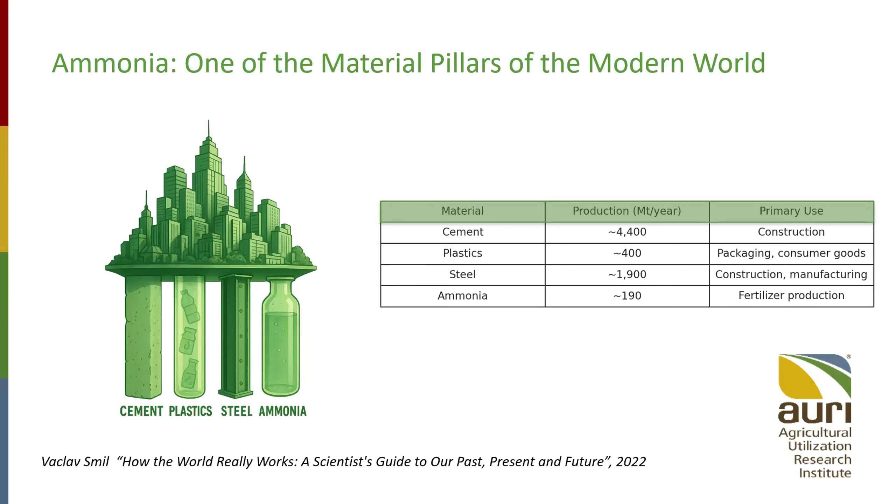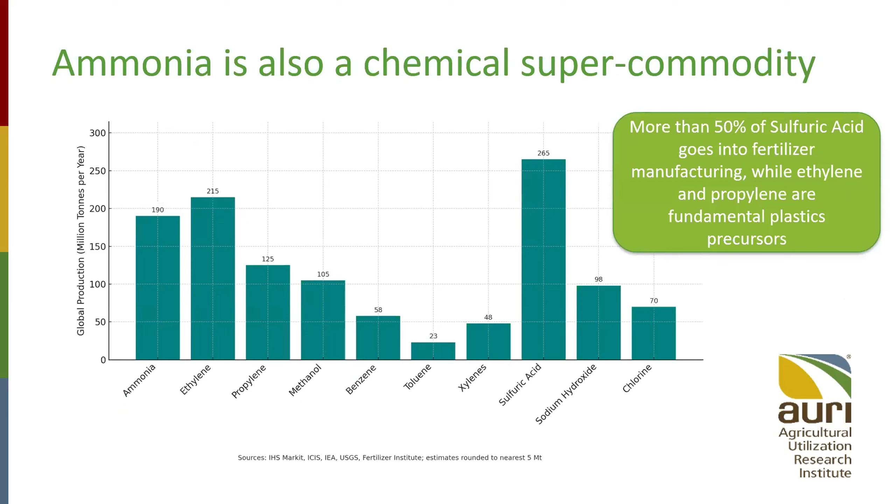However, if this morning any of you had breakfast, probably you have eaten something that owes its existence to ammonia, because ammonia is also a super commodity. It's a very large product. It's the third largest chemical produced, second only to sulfuric acid and ethylene. Ethylene goes to plastic, and sulfuric acid also goes into fertilizer. But ammonia is really the linchpin of every single fertilizer used today. This is a schematic of the fertilizer supply chain, and everything is tied in from ammonia.

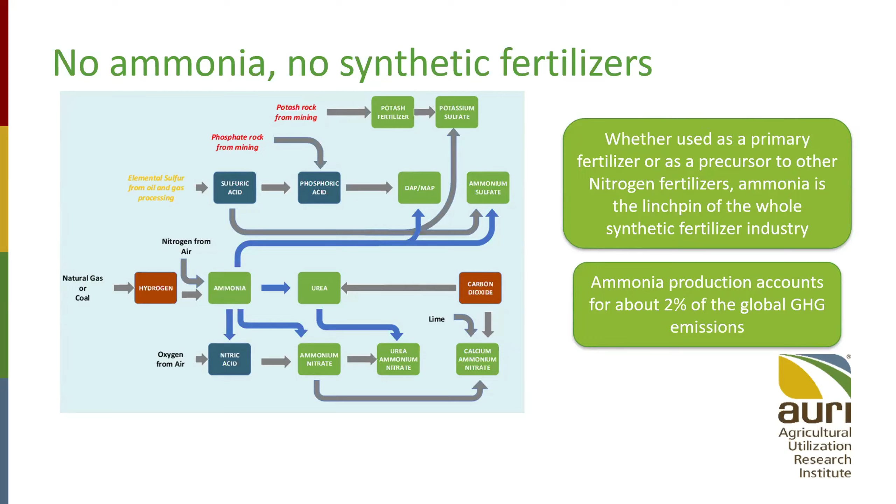As you can see from this diagram, hydrogen is the primary feedstock to make ammonia, where hydrogen and nitrogen from the air, which is very abundant, are synthesized to make ammonia. This is a modern invention. Before the Haber-Bosch process was invented in the early 20th century, ammonia fertilizer all came from natural sources: recycled manure, guano, which is basically fossilized manure, and crops like legumes that fixate nitrogen from the air.

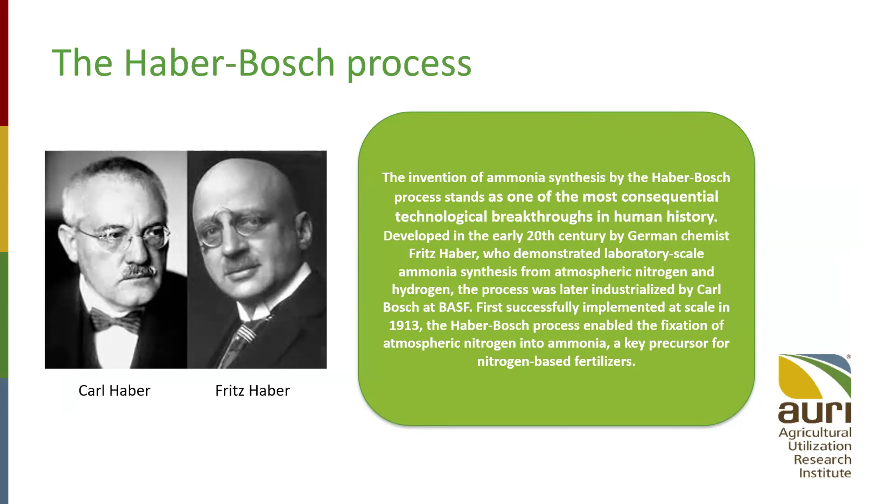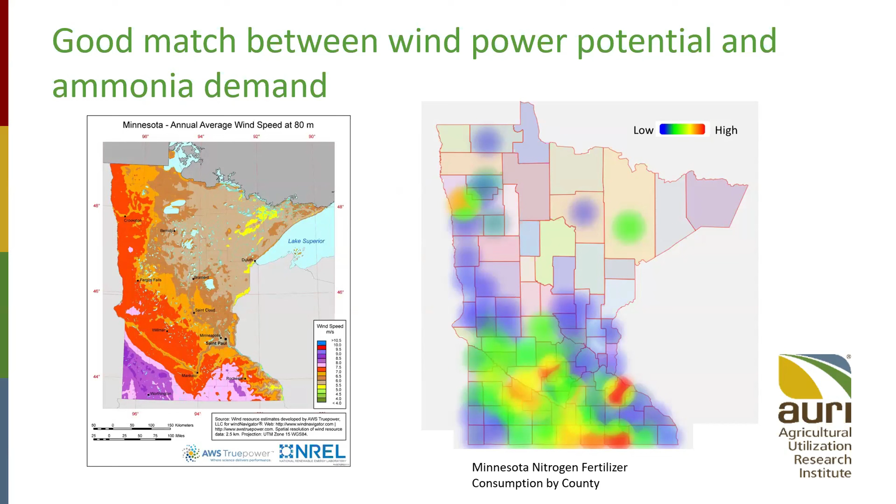But we could make hydrogen differently. For instance, we can make hydrogen by electrolysis. And what is interesting is these two charts, which show on one side the wind resources in the state of Minnesota, as an example, and the Minnesota nitrogen fertilizer consumption by county. And as you see, there is actually a decent match between availability of wind resources and demand for ammonia, which leads to the opportunity to look differently at ammonia,

looking at local distributed ammonia production. A world-class ammonia plant today is hundreds of thousands of tons per year or millions. Some of the larger plants in the US are in the order of 3 million tons per year. Instead, we are looking at whether we can build, and technically we can, smaller ammonia plants tied to local distributed electrolyzer capacity, which in turn is tied to local wind production capacity, providing locally and arbitraging on that big spread associated with distribution and logistics, while maintaining a lot of value in the local community.

And so again, I think there is a great opportunity for small scale distributed ammonia production. Later, Mike Reese will talk in more detail about these economics and will probably go into many more quantitative details. But ultimately, with this presentation, I just want to give a very short but broad overview of why ammonia is important, more than important, indispensable, and what direction we should look at to make sure that we can continue to rely on ammonia while mitigating some of the economic and environmental impact that it might have. And with this, I leave it to the next presenter.

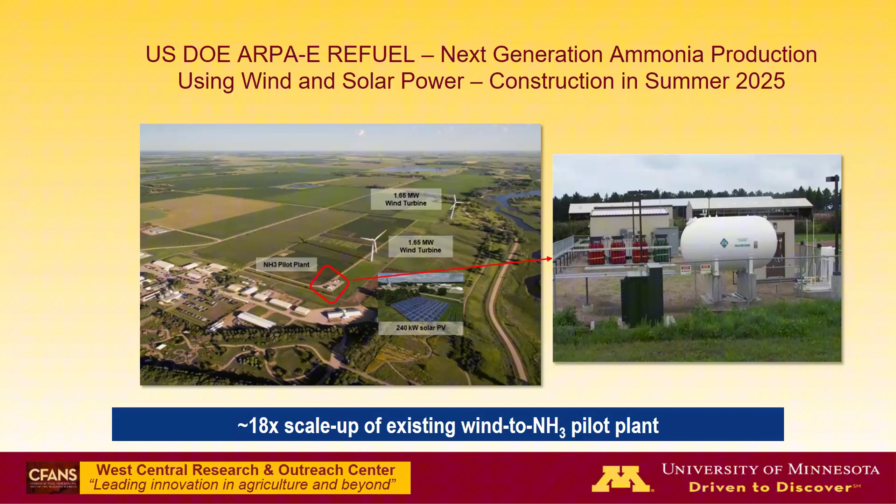Minnesota is a global leader in green ammonia research. We had the first wind-to-ammonia pilot plant in the world back in 2013 and have looked at other projects such as using ammonia in grain drying as well as tractor fuel. Our next project, which is scheduled to start construction very soon, is the next generation ammonia production system using wind and solar power and utilizing some advanced ammonia reactor designs as well as control systems.

So conventional ammonia plants today are at world scale. They use natural gas as the core energy source or hydrogen source in the United States. In China, they use coal, but here in the US, we have established our ammonia production essentially located around natural gas sources. And that's why we see quite a bit of it in the Gulf Coast, in Louisiana, and in Oklahoma and Texas, and not so much in the Corn Belt.

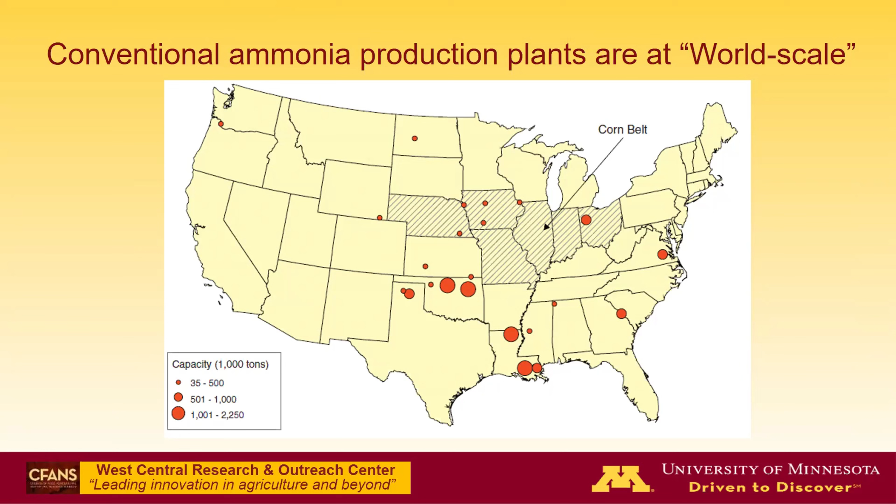In this diagram, I'd like to point out that Minnesota isn't included in the Corn Belt, but I think those of us from Minnesota would say we are definitely within the Corn Belt.

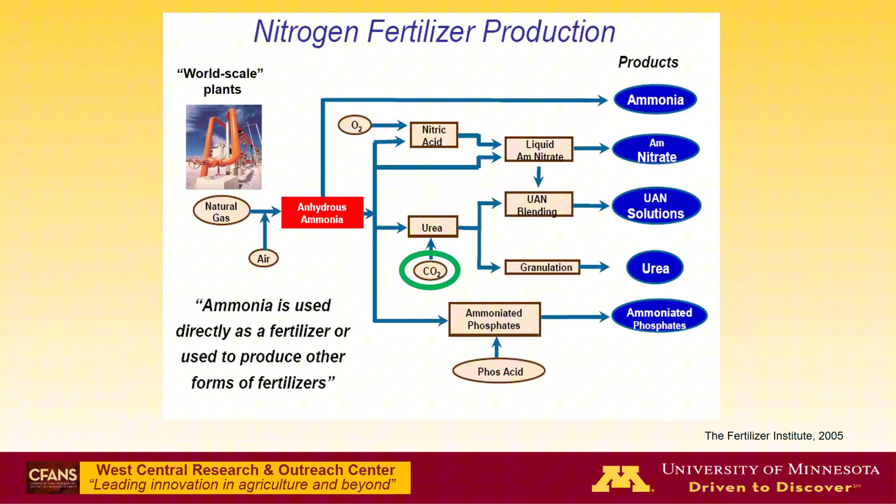So the nitrogen production, again, is at world scale. Anhydrous ammonia is the core. We use steam methane reforming to break down natural gas into hydrogen. And then anhydrous ammonia is processed further into other nitrogen sources, as Luca said. I wanted to point out that for urea, we blend ammonia with CO2 to form urea. And that's going to be important further down in my presentation.

If you look at nitrogen fertilizer use by state in the Corn Belt, we see Iowa, Illinois, Nebraska, Minnesota, all of these states have extremely high consumption of nitrogen fertilizer. And interestingly, there's very little ammonia production in these states. And that gets back to what Luca was saying, that there's essentially a $300 difference between storage, transportation, as well as the margins that are charged in each of those steps to get it up to the Midwest.

You look at green ammonia, which is renewable ammonia made from renewable sources such as solar or wind. You look at the wind resource that we have, which is depicted in the left graph. The dark purple and lighter lavender colors are the high wind resource areas. And then you look at the Corn Belt, which is identified on the graph on the right with the dark green counties. And you see a nice synergy where we can use renewable energy to produce renewable ammonia.

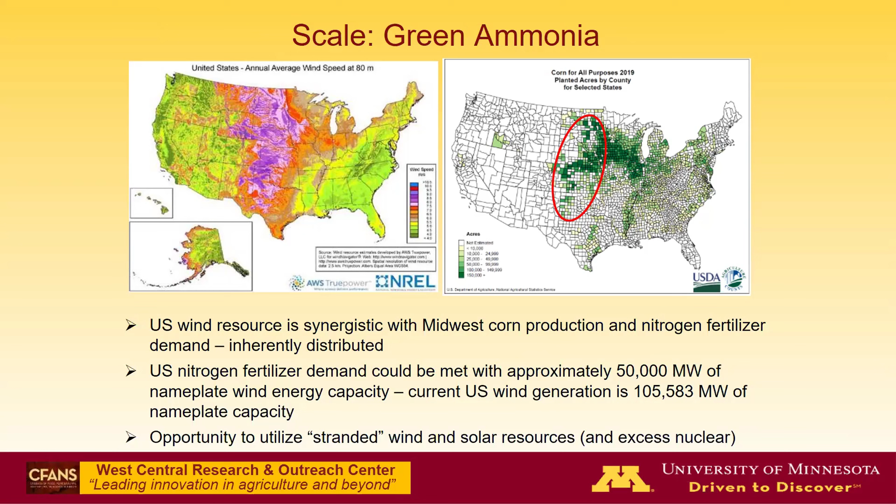We could meet the entire U.S. demand for nitrogen fertilizer with about 50,000 megawatts of nameplate wind energy. Right now, we have over 100,000 megawatts of wind energy, so we could essentially add another 50%. And this is an opportunity to utilize wind and solar resources and excess nuclear power where it's stranded, where there isn't the load. So we're essentially creating a load with this energy-intensive industry.

When you look at the renewable nitrogen fertilizer market in comparison, you would produce it closer to demand. Renewable energy such as solar and wind is typically considered a stable cost. Utilities sign 20 to 30-year contracts for that power. Then along with that, we would have the local economic development.

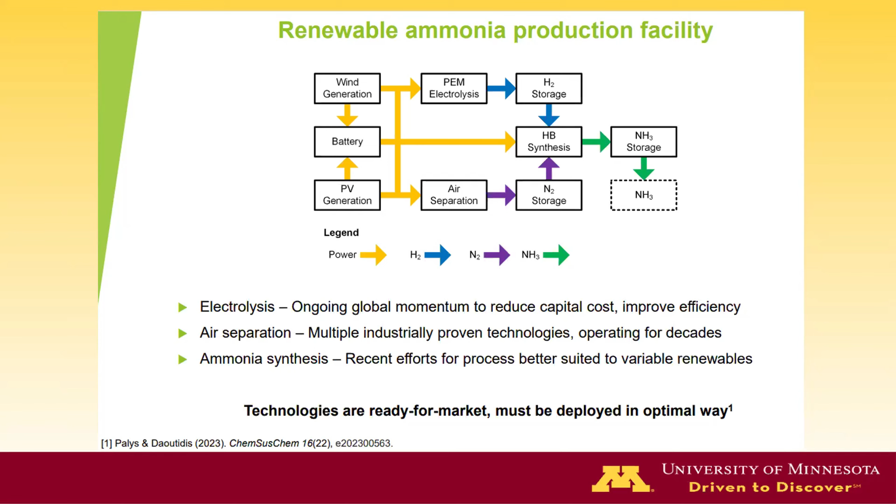So this system would include electrolysis. So you're electrolyzing water to produce hydrogen. You're pulling nitrogen from the air through air separation and then combining it together through ammonia synthesis. And these technologies are different at a smaller scale than what they would be at the world scale plants. And so these technologies must be deployed in an optimal way. These technologies are, however, ready for market. And as new technologies become available, they are entering the commercial system as well.

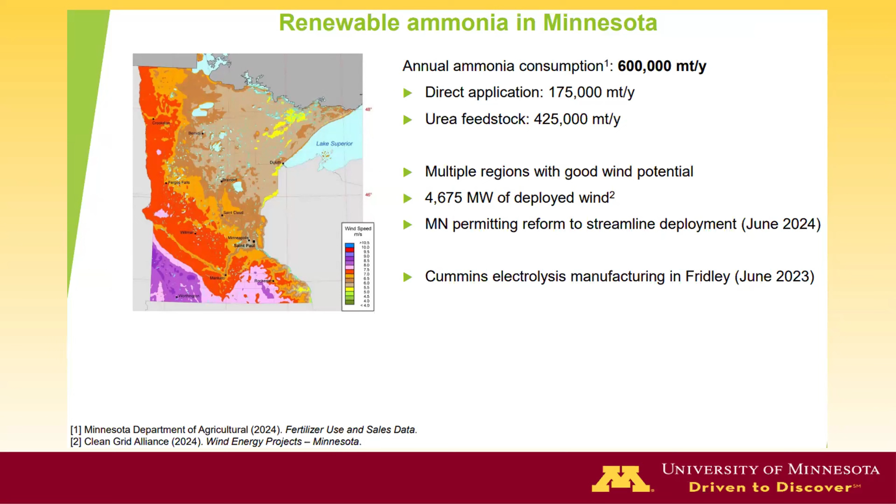So just to take a case example of ammonia in Minnesota, we utilize about 600,000 metric tons per year, both in ammonia as well as urea. We have good wind resources across the state, especially in the Southwest. There's some factors that are enabling this. We have some permitting reform in the state. We've also established electrolyzer manufacturing in Fridley to supply these electrolyzers, which is kind of a critical supply chain element, having the supply of these larger electrolyzers.

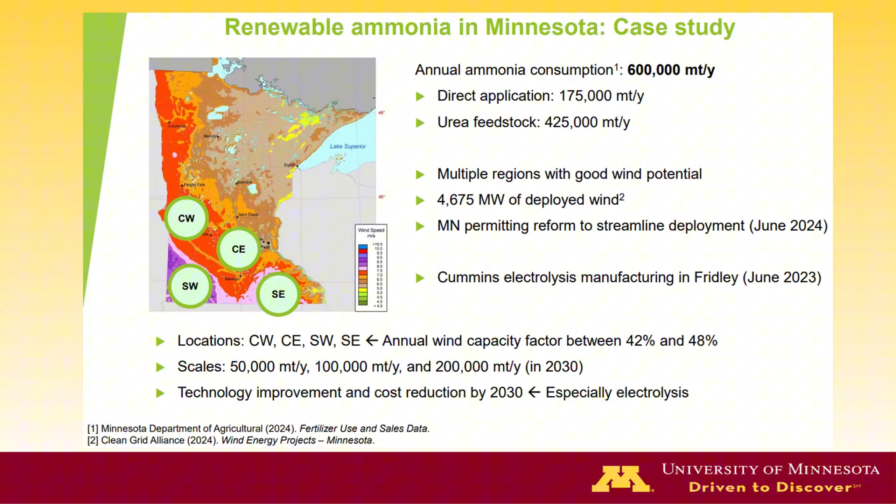So if you look at renewable ammonia production in Minnesota from a standpoint of where to do it, the wind resource makes a huge difference. So my colleagues, again, Matt Palys and Prodromos Daoutidis, did a study on this, looking at producing scales of 50,000, 100,000, 200,000 metric tons in central west, southwest, central east, and southeast Minnesota. And here's a view of the results. And location does matter, by the way. So if you take a look at central east versus southwest, you see almost $110 difference per ton between those two places. And so that's one of the outcomes.

The other outcome is if you look in general at the top of the screen, you see 666, 668, 558, 583. That's basically the break-even price of the ammonia production at that scale and at those locations. So it's close to being where we need it to be competitive, not quite there yet. So if you look at a larger scale, in this case, it's 50,000 tons versus 100,000 tons. You can see at the lowest in Southwest that we're down to about $500 a ton. So we're driving that price down. So the overall point is that scale still matters. For that 100,000 metric tons, you would need about 275 megawatts of new wind capacity to do that.

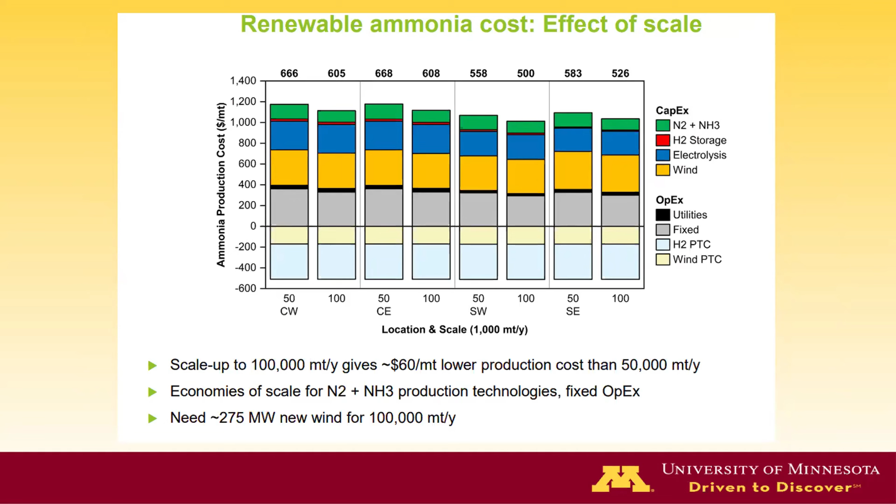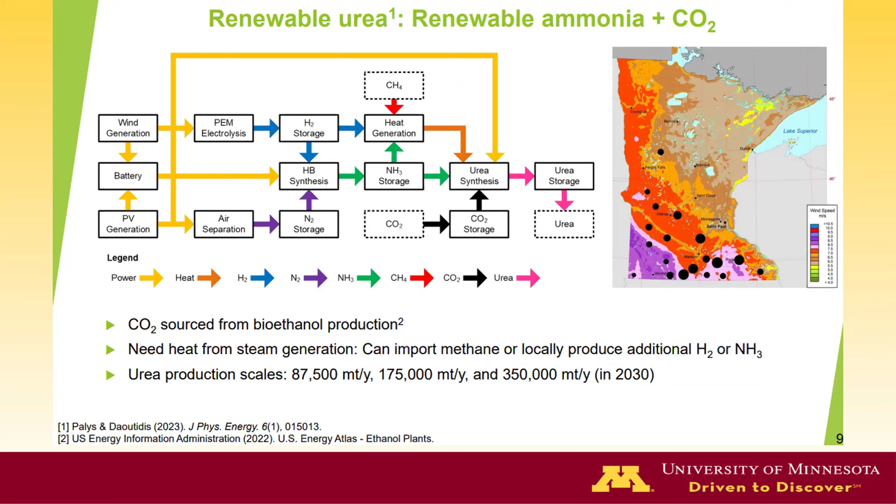I think an interesting part that we could further explore, and Luca mentioned this briefly, is combining renewable ammonia production with the CO2 that's produced at our ethanol plants. The state map on the right shows where the ethanol plants are located and their size. And so the idea would be that we would take wind energy from some of these high wind producing areas. We would, at the site, produce hydrogen, convert it to ammonia, and then truck it or pipe it into these ethanol plants, combine it with the CO2 to produce urea.

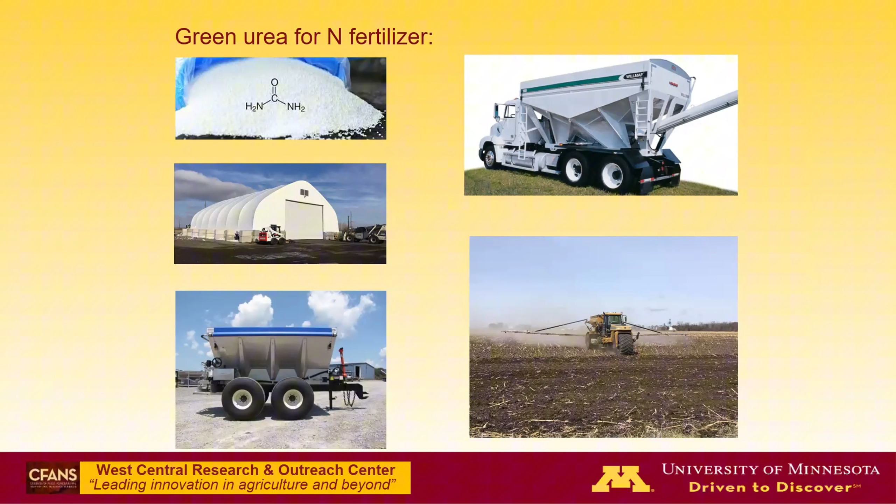Let's move on to this. I think green urea is also nice in that you're taking it out of the conventional nitrogen fertilizer supply chains. For example, ammonia requires large-scale refrigerated storage, whereas urea you can store fairly easily and it applies fast and convenient for farmers. Our cooperatives are set up to store essentially their complete consumption for the year, so they have these large urea facilities that they can bring urea into and store for the year. So with that, hopefully I gave you a picture of the difference between small scale versus large scale conventional production.

I think the overall message is that we can do this at small scale. Scale still matters. It's better to be on the larger side of that, similar to what we've seen in the ethanol industry, where a 100 million gallon per year plant is more competitive than a smaller plant. So I guess that's the overall message, and I'll pass it on to Tristan to talk a little bit more about turning this into a commercial reality.

Thanks, Mike. Appreciate that. Let me get the slides up here. Give me a second. And while you're doing that, Tristan, I'm just going to remind audience members to use the Q&A box down on the bottom if you have questions for the panelists. Okay, bear with me a second. All right. Sure. Okay, can everybody see this? All right, thank you.

Building on what Luca and Michael had to say. My name's Tristan Peitz. I lead the business development efforts for Talus. We're a small scale green ammonia company. We really think of ourselves as an energy technology and infrastructure company focused on producing green ammonia.

I'll go over this quickly because Luca and Michael gave a great overview, but ammonia is responsible for feeding a majority of the world's population. Without it, there'd be serious food supply issues. It's a complex global supply chain, and as they both said, it's typically produced in large centralized plants. And because it's a gas, it needs to be stored as a liquid, whether that be under low temperature or high pressure.

We produce ammonia, and this is actually a slide from our international, customer focused deck, making the transition from urea to ammonia, because in the developing world, the genesis of Talus was really around producing fertilizer locally in places where there is no supply chain or where the supply chain is incredibly expensive for urea. And so some of the things that we think about are, ammonia is more efficient than urea. First and foremost, it's cheaper. Of course, there are issues with the logistics, but if you can produce it locally, you can alleviate that heavy and expensive logistics burden.

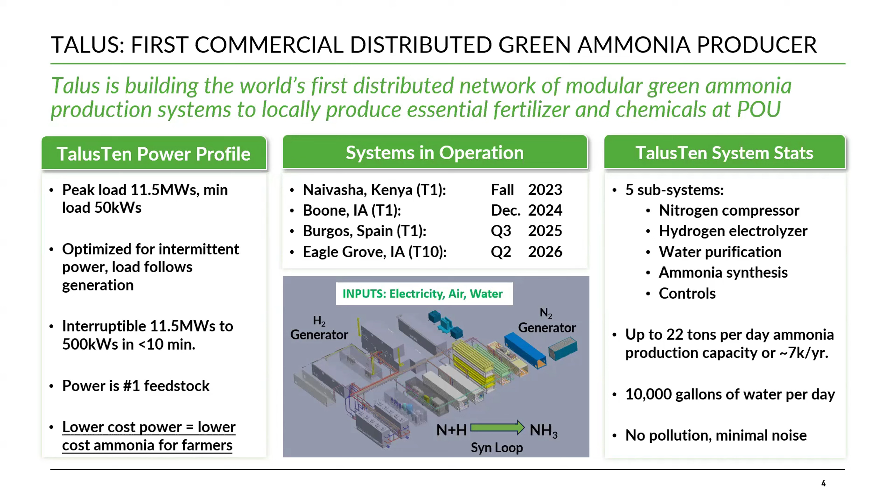The interesting thing about the system in Boone is that we're currently integrating it with Landus's grain facility and the solar that Landus built. They have highly variable power usage because they do grain drying and load trains. When they start drying grain or loading a train, our system gets a signal and it ramps down. The power is routed from the solar to their facility, and they expect to save as much money on power costs at this site as they expect to make selling the ammonia.

These are photos of the system. This is an old photo on the left of one of the electrolyzers being loaded into the module at Eagle Grove. On the right side is the system in Spain. You'll see it's a little bit different - there's an adiabatic cooling system, which uses a lot less water and more energy. These TalusOnes are demonstration scale units as part of programs to deploy many more of the larger TalusTens on long-term offtake agreements.

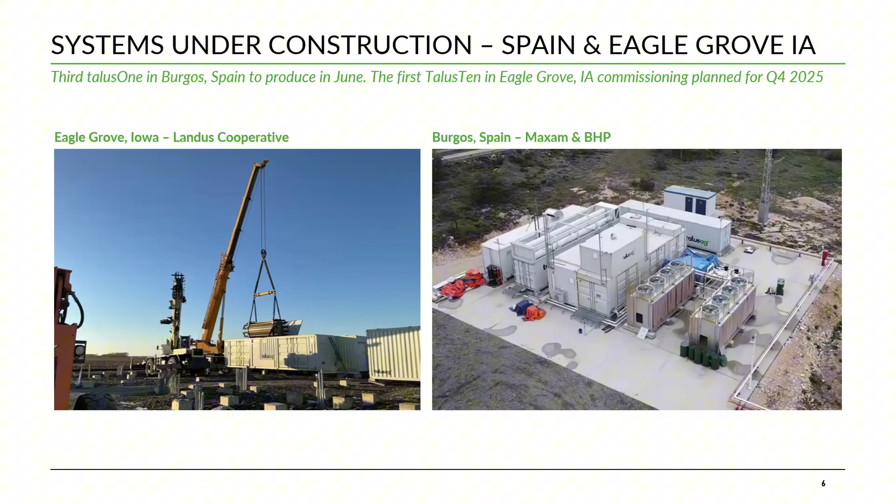So that's a demo unit as part of a program to deploy systems to Maxam and BHP in Chile at the mine sites.

The key value proposition that makes this possible in the U.S. is the rampability. The grid in the U.S. is designed for the peaks, and so what we do is we operate in the valleys. We avoid those peak times, which enables us to produce low cost ammonia.

Fundamentally, ammonia is a commodity. There currently is no green premium. It's possible that one develops. Certainly, the large plants on the coast in the Gulf and elsewhere in the world expect to sell high-priced ammonia into Europe and South Korea and Japan. But that's not our sandbox.

When we think about operating the system, it's really producing hydrogen and ammonia at the times when power costs the lowest. Some cooperatives and electric utilities have interruptible rates, time of use rates, load management programs, demand programs, and this is a key point of how we are able to price ammonia at what we see as a discount to the long-term average.

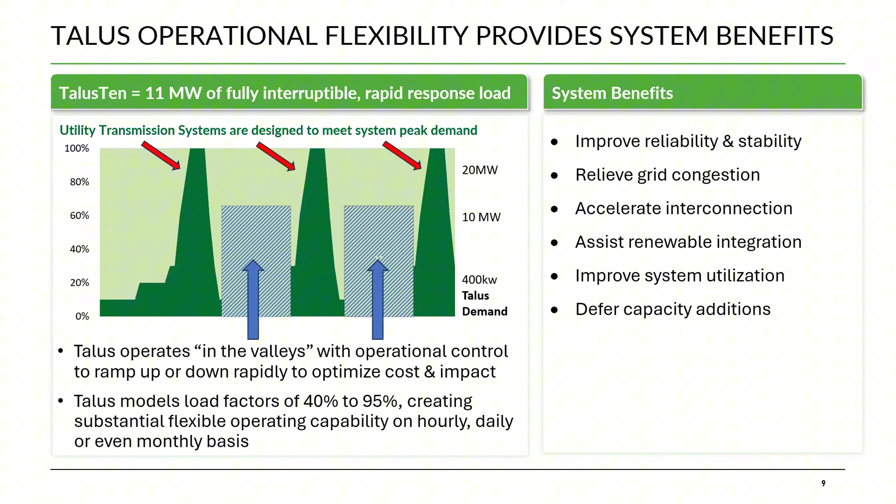I'll get into the contracting structure in a minute. But building on what Michael had to say, you think about the great power generation resource in the Corn Belt - it really is wind. It's the highest capacity factors in the country. There's really good intersection of local ammonia demand and high capacity renewable power, which also happens to be the cheapest form of electricity.

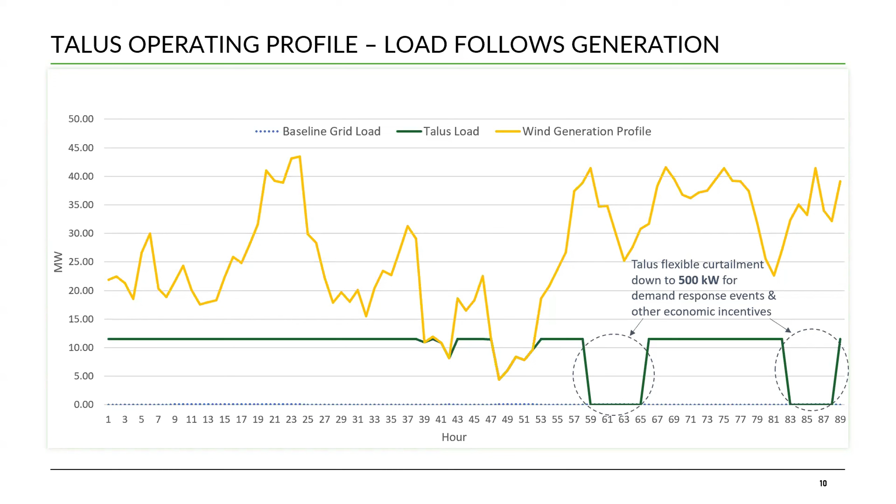Our system is able to ramp down, which is important to miss those peaks. Then it can do that pretty quickly and ramp up a little bit slower, but still sufficient to work with the rates that some of these utilities do offer.

I want to talk about the tax credit briefly, and we'll come back to this as a lead into Rob. Effectively, 45V is what created an opportunity for Talus to build a business in the United States. Prior to the Inflation Reduction Act, our CEO Hiro Iwanaga, a co-founder, funded the early research in 2008 at Stanford to develop a modular small-scale green ammonia system that works on renewable power. It was conceived for this rural, remote, developing world application. With the tax credit 45V, which is a production tax credit, we can sell ammonia in the United States and be competitive.

Now, we did get clarity last week. The big beautiful bill was signed into law, which provides effectively 5 years for companies, from start of 2023 to January 1, 2028, to start construction. We worked very closely with the Senate Majority Leader's office when the first draft was released to ensure that we had the runway to get these projects started.

The ammonia market is an interesting one. It's opaquely priced - there's no futures, there's no forwards.

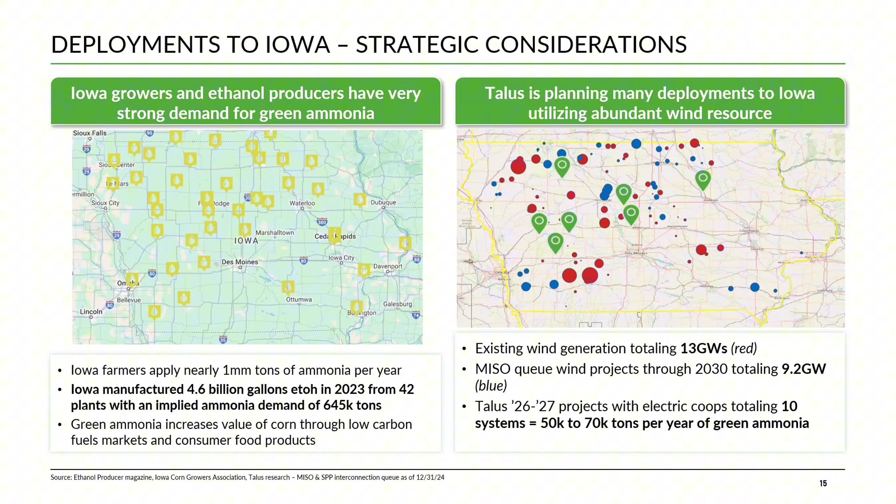Moving on, South Dakota is a very interesting one because there's abundant wind, but no nitrogen fertilizer production at all. And those farmers pay the highest prices in the Corn Belt for nitrogen fertilizer.

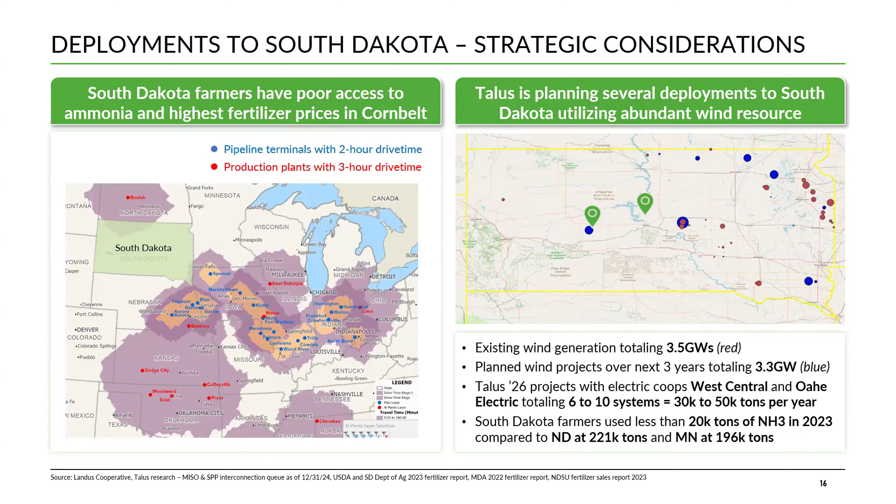The last thing I want to touch on is in order to qualify for 45V, we need to evidence that we've used clean power through REC or EAC purchases, and that has value in ethanol and other markets. We can actually sell the green attributes of the ammonia, and that's something we're working with Rob and CleanCounts on. So with that, I'll pass the baton here. These green attributes - you can think of it as effectively a global food producer, food and beverage, will pay us for the environmental attribute, which is another form of revenue we use to further reduce the cost of the ammonia to the American farmer.

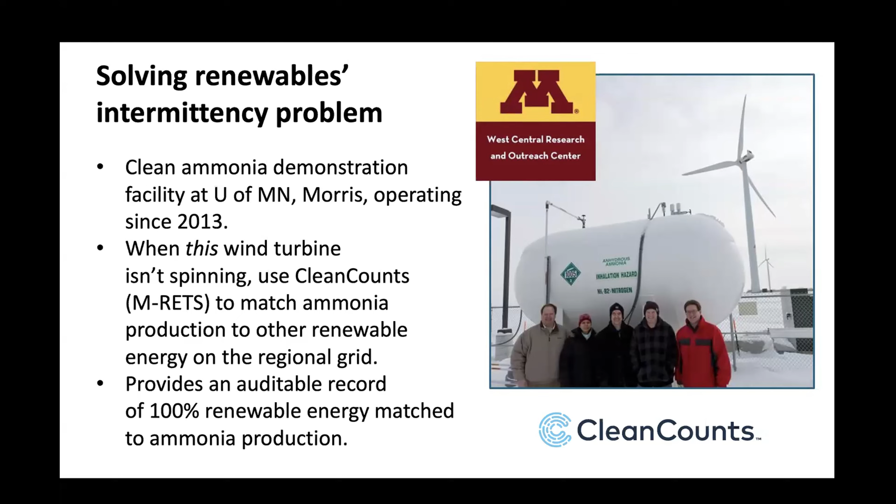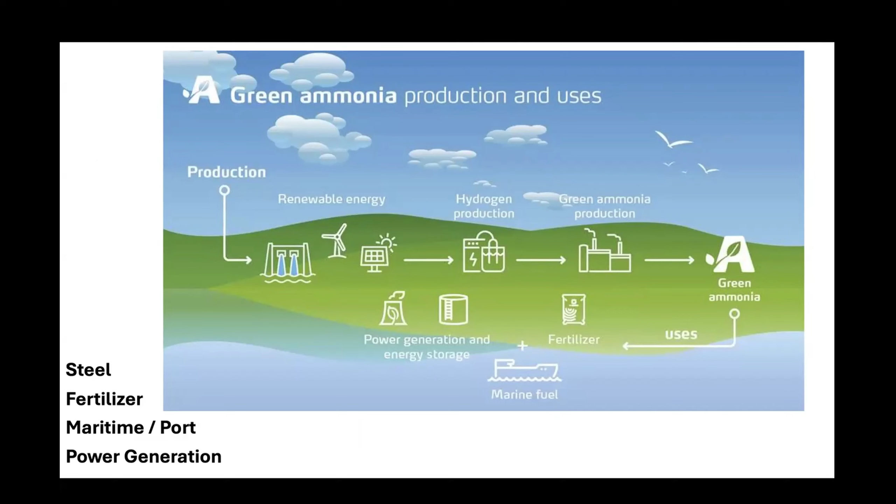It's really a treat to work closely and collaboratively with Talus and other leaders in this space, to do both demonstration and bring to scale systems that show the opportunity for ammonia and the difference this can make in the lives, livelihoods, and economies of rural America. We're excited and ambitious for the opportunity across the Midwest and in places suffering from fluctuating renewable prices. Ammonia fertilizer has great opportunities with fertilizer use, but there are also multiple other uses, from steel to maritime to power generation to mining.

Very much appreciate Rachel, you and Nathan convening this conversation today. So timely and well orchestrated to be right after the news of the finalization of and having certainty with regards to 45V. Thanks for convening the conversation today.

Thank you, Rob. That gives us a good lead into the main question around 45V, since it is so fresh. So, and this can be for all the panelists, whoever wants to start first, otherwise I can call on you if nobody jumps in: how are the new final rules for 45V, particularly the requirements around deliverability and time matching, expected to impact project development timelines and investment decisions?

I'm happy to speak on this one. The initial draft, the House version and the initial Senate version, were certainly causing a lot of concern from our stakeholders, everybody from investors through to electric utilities and customers. It was talked about in just about every meeting. So having this clarity and certainty through January 1st, 2028 on what's available, is it going to be around, is really helpful. These projects are complicated, the contracts are complicated. They're infrastructure projects, and these things always take a little bit longer than you expect, and in some cases cost a little bit more than you initially budgeted. So having a longer runway is really helpful for all producers and project developers.